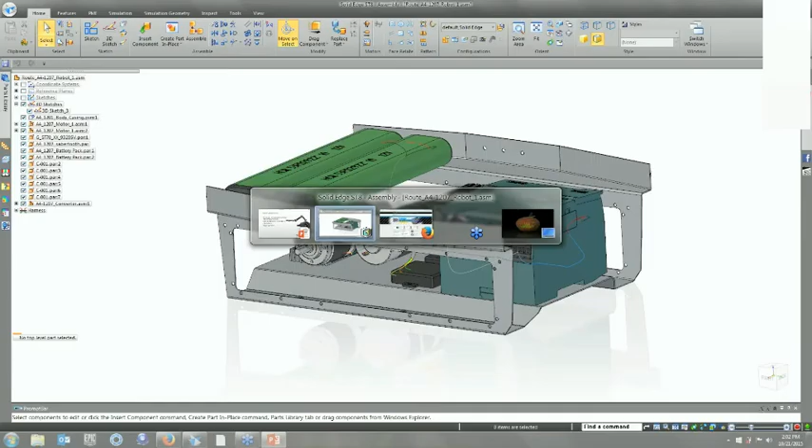Thank you, Diana. Well, thanks folks for taking a look. What we're going to be talking about today is wire harness. Again, it's not a well-known used portion of Solid Edge. This is the first time there's really been any much change to it in the many years that it's actually been in the product.

So the first portion of this, I'm going to show you some automated, basically, wire creation. I'm going to be using E3 Zuken. Basically, they can output wire harness information that we can apply to our 3D geometry by adding pins, connectors, and locations to geometry. So I'm going to go ahead and run through this process. Again, it's under the harness location in Solid Edge.

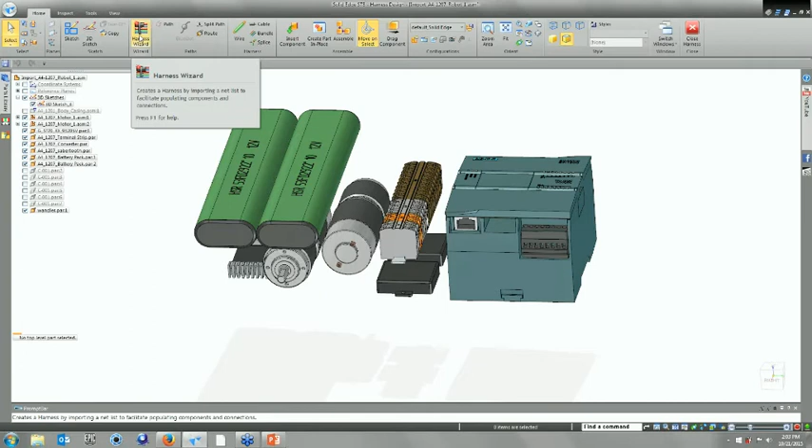All right, so we have this harness wizard. Most of the time, most people usually are generating lines based on their own sketch paths and telling those to be wires or bundles, etc. In this process, we're actually going to be using...

Let's see, where did I actually, I had these saved earlier. Let me go grab these real quick. Here we go. So these are actually coming from the E3 Zuken. I'm going to get the file location for these so I can populate that in Solid Edge.

So what I'm going to do is come out here and look for two different portions of this. First off, we have a component document, and it's an XML format. So we want to look for the CMP, which is the component portion of it. Then we want to go and copy the connection portion. So basically, it's telling it what component and what connectors on those components are going to be creating the lines for the wires. That's the two pieces of information I need.

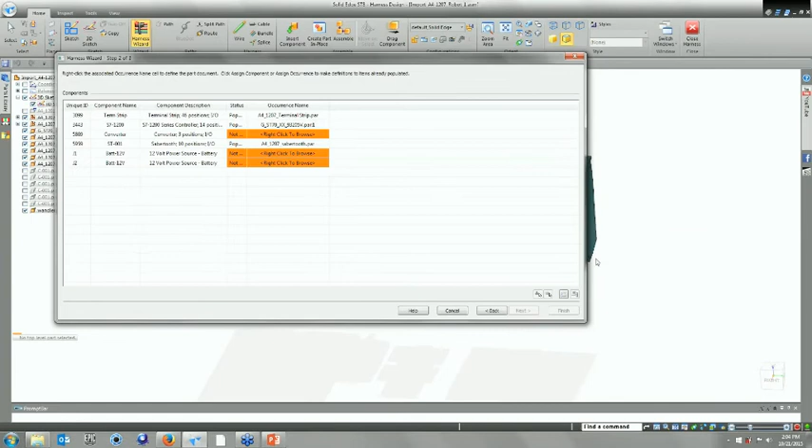There's a couple things that were added after the fact, before that wire path creation was, or that report was created. So there's a couple items we need to add. Let me minimize this a little bit so we get to our items. So there's a couple batteries, and there's a converter.

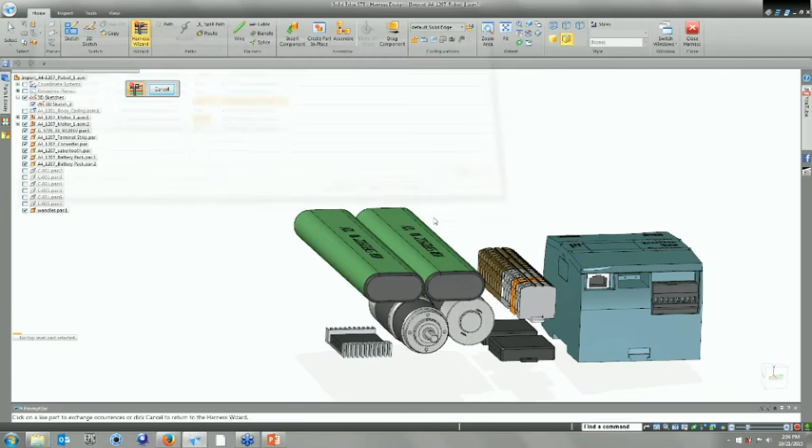And I know these two batteries are the ones I need to add to the list. I'm just going to go through and add that one, and let's go ahead and add the second battery. Lastly, let's go through and add the converter down here to the item list.

Okay, all right, so the last thing is just to go ahead and let the software finish it off. All right, so it's going to go through, and it's pulling this information, again, from that Zuken generated side. Of course, it works with Bentley Promis.e—there's 4 or 5 different wizards it works with. So it's pulling the information of what type of component it's coming from and telling what terminal it's going to go to. And here's the description of the items.

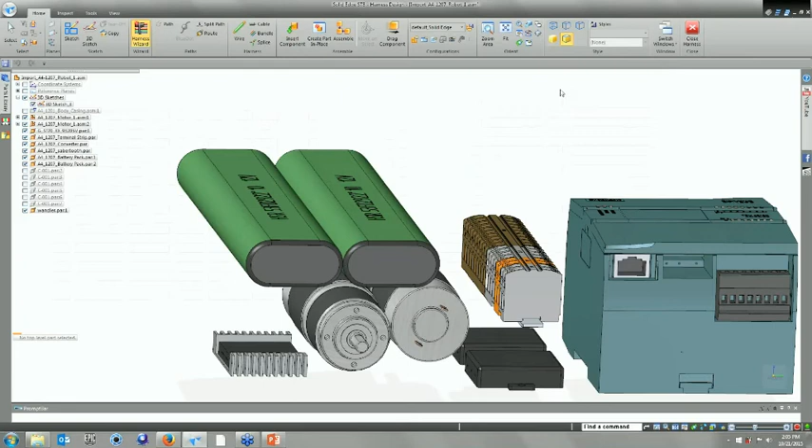You can actually go in any time and change the type of line you're actually going to create right through this table. I'm just going to leave the defaults because that's what's being referred back to the list. I'm just going to say finish. And there it goes.

All right, so what it did—it doesn't necessarily do a pretty job of locating the line, the actual connectors to go to the components, to the actual pins that they're supposed to go to. But that's what's new about the new version of Solid Edge, ST8. They have some of these new routing paths and some splice capabilities to create line paths.

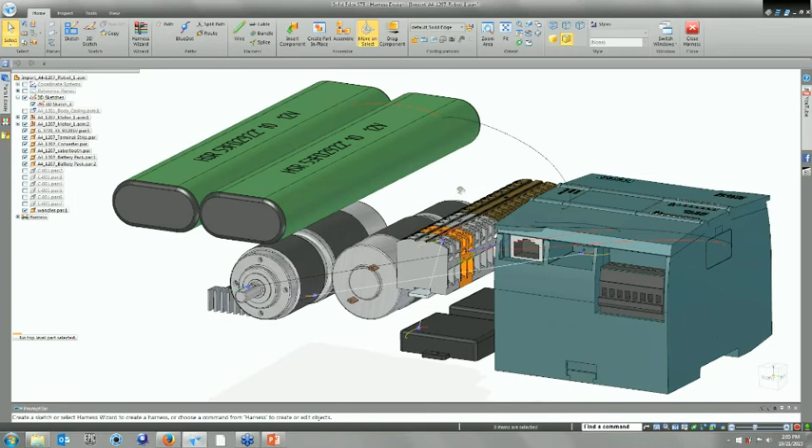So I'm going to switch over to a predefined one I've already created. Let me hide this actual sheet metal body around it.

So what we have here is the exact same layout, the same parts. I did the backside already, so I went through and said create conductors, and it actually made these components for me, but they're already in place.

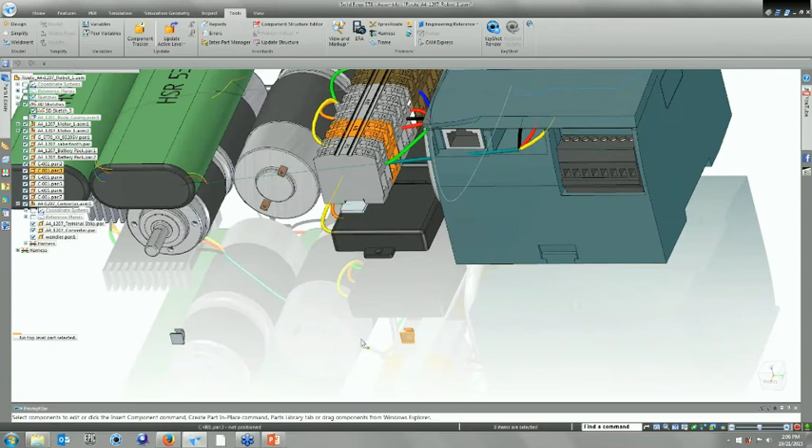You notice I actually have that path right here that's going through all these components. So I'm going to use these two little connectors in the front like I did in the back to locate these little bundles. All right, so that's the new thing we have right here.

So I'm going to get back into the harness, and I'm going to use what they call route. I can go and grab any of these lines, I can grab this bundle, and what I'm going to do is tell this bundle to locate itself. I'm going to use the cylindrical edge of this to tell it to go through this path, to go ahead and move it out of the way.

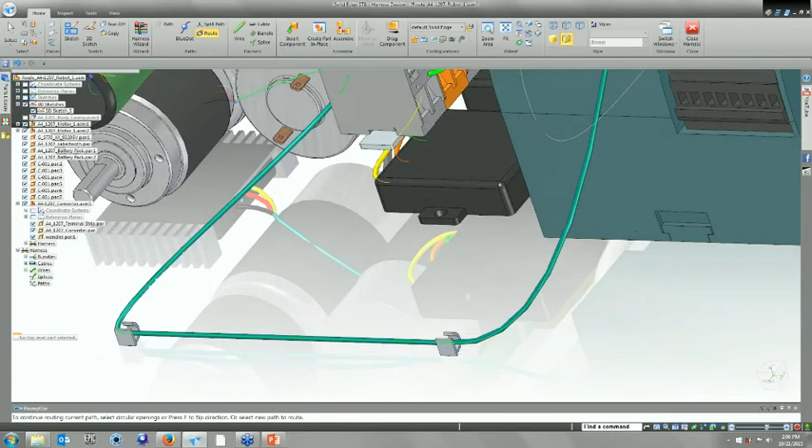And of course, it's still kind of bumping up inside there, so I'm going to go ahead and finish that off. Just going to go to my right side view, and I'm going to go ahead and just use the manipulation tool.

So for those who haven't used the wiring, let me move this around so you can actually see it. We have this little coordinate system, and that allows you to grab key points and move it in specific locations. So we have the planar option.

So if I want to move this planar anywhere I want, or if I just want to move it axially, I can just grab the axis. Of course, you can use your shortcut key, Z for the axis, X for the plane.

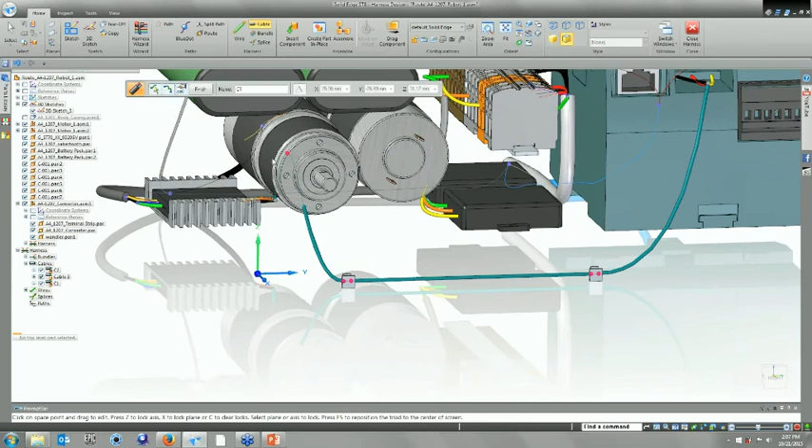All right, so I'm just going to go ahead and move it planar to the Y, and then I'm going to go ahead and say, let's go ahead and move it planar and Z. All right, so that's missing everything. If you just want to look at the side view, it's a little easier to see sometimes.

And let's just go ahead and move it to the planar location. So I'm picking the plane, and this allows me to move freely on a planar space as opposed to a linear movement. Let me move this a little bit further. That looks good right there.

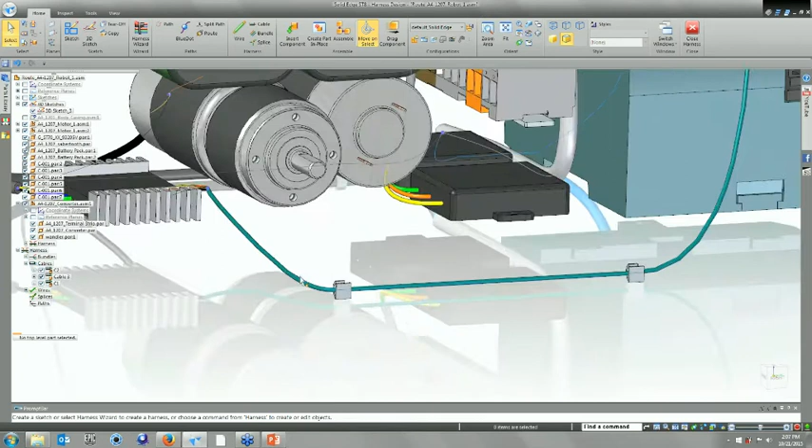All right, so that's taking care of that path. And of course, we need to actually add a few components to this. We only had one motor previously created, and we have another motor here that was added to the list.

Another component, notice we have that other converter that I added that doesn't have the information. So that's why these electrical wires were not created for these particular components, because there was no information to make them intelligent. So let me show you how that was done.

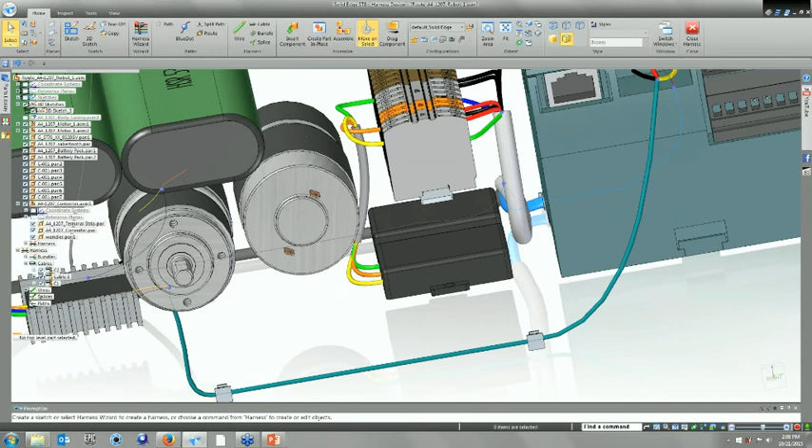All right, so there's no magic to it, it's really simple. Strangely, it's been in here forever, and I've seen this assign terminals, I had no idea what it was for. Now that I've gone through this wiring, some of the new stuff, I figured it out.

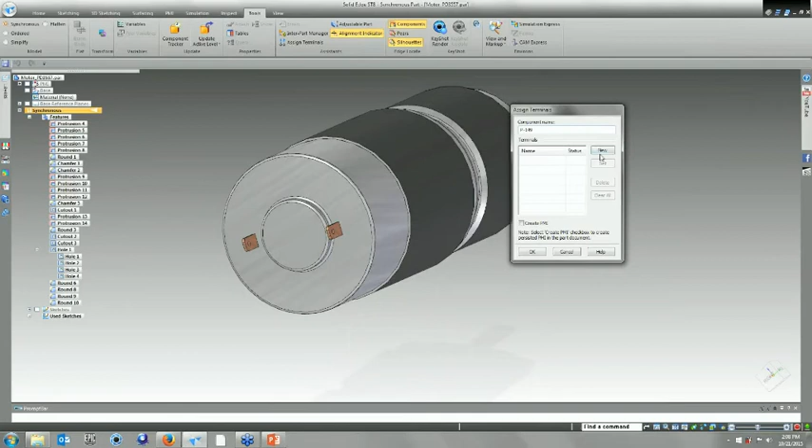So give it a name. Let's call this the unit, P149. Then we're going to assign the terminal. I'm going to say new, we'll call this terminal 1, and there's two terminals on here, so we'll go ahead and create them both at the same time.

All right, so I'm going to set this terminal to use that edge right there, so it creates this little PMI dimension for me. And then let's go ahead and set terminal 2. Go ahead and say create PMI, say OK, so I can use this later on. Then you'll see what I'm talking about.

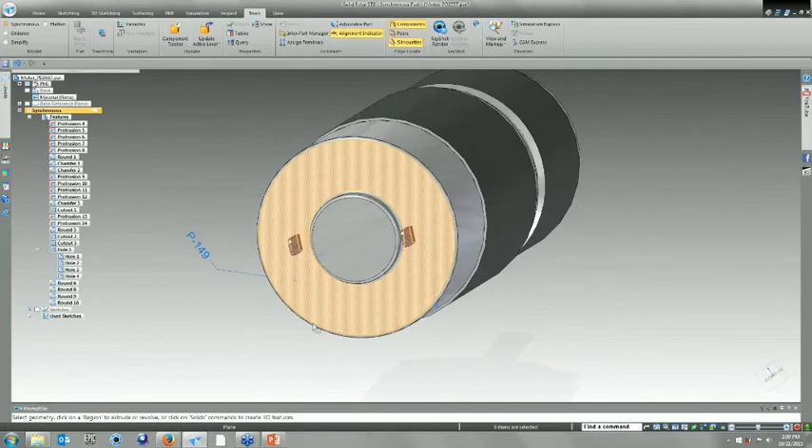All right, so I created that. That's really all that wiring diagram is. You just go through your parts and apply what connecting terminals go to what component. Simple as that. All right, so I'm going to go ahead and save that and close it back.

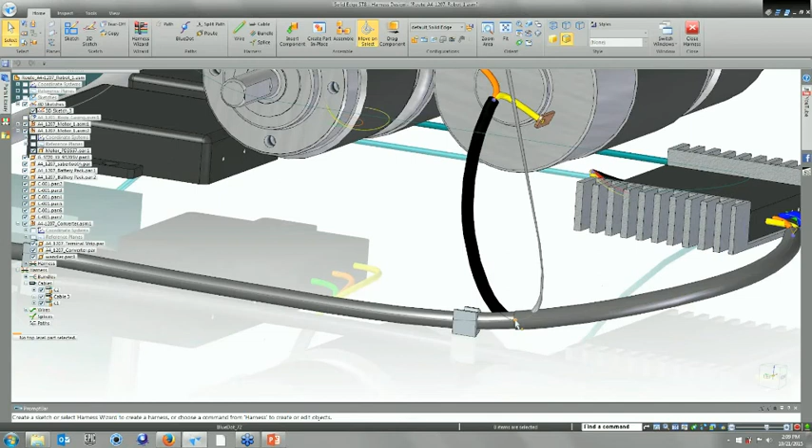All right, so let's go ahead and get this wired up. I can go ahead and run a path, but notice the one on the back has a little split in it, so they actually added a split here and added it into this little bundle.

Let's go ahead and create a path. This really hasn't changed since the previous version, but before I do that, I want to create a little split on this path to tie into. So I'm going to come over here and say split path.

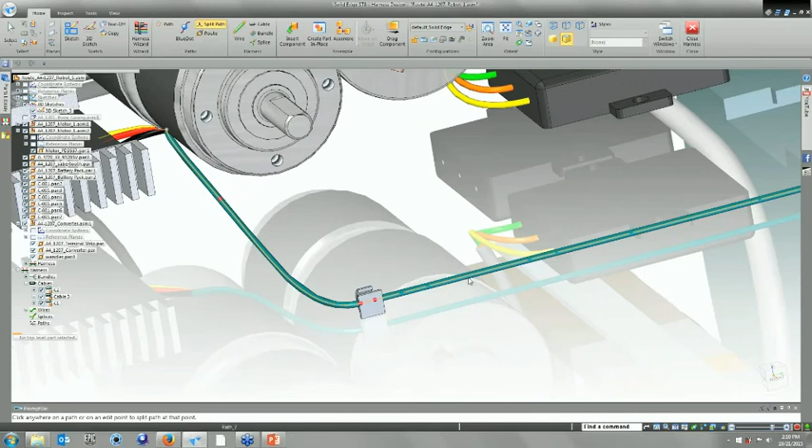So this is new. I can just pick anywhere along this line, eyeball it, and split the path right there. And let's go ahead and put a little split right there. So the wire is going to come in here, come out this end, and continue on.

All right, so now we can create our path. I'm just going to run a few lines here, and again, I'm going to look at it at a particular front view or side view. That way, when I'm placing my geometry, I'm just looking at it from this view.

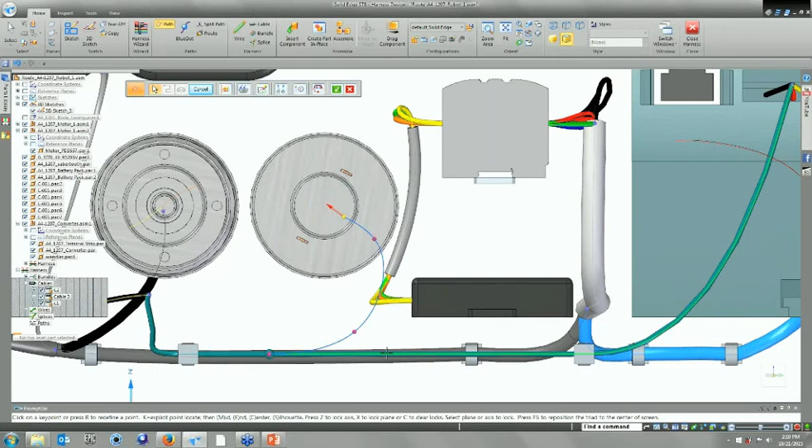You'll see what I'm talking about once I place it. When I go back to my ISO view, you see it's a straight line, which is fine, but we have these little key points in our coordinate system. So let's move that in closer, and drag that dot a little closer.

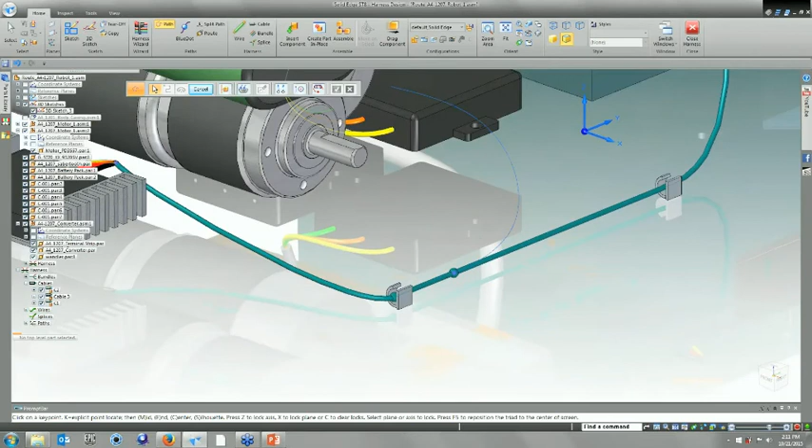Now that we have that position, that looks good. Go ahead and finish that off, and then we'll create another path. This one, I'm going to come out of, rotate around so I can grab that endpoint. There we go, I'm going to grab that endpoint right there.

Again, let me reposition myself, looking straight at it, and do the same thing. I want this to kind of come close to that connector point right there. Same situation, we need to move it over. So I'm going to grab the key point, tell it to move in the x-axis, and just move that down.

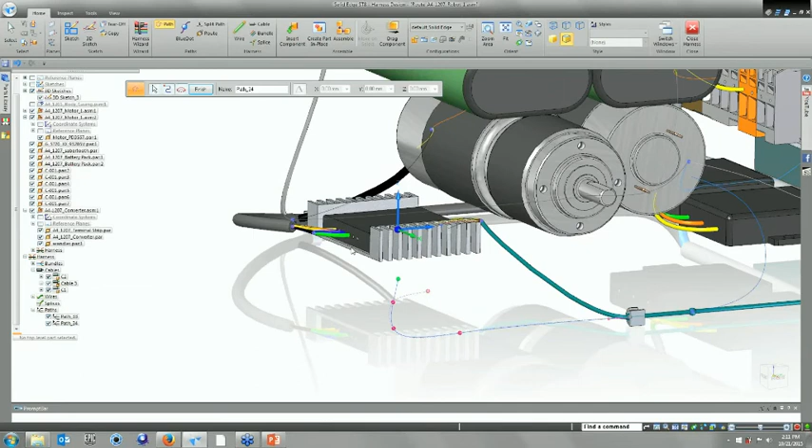Let's look at the top view to see how far I'm doing it. Just go ahead and keep dragging that. That should be good right there. And it's not that point, that point, let's go ahead and move that. That should work, that looks like a good place to put a connection into. All right, so that'll work.

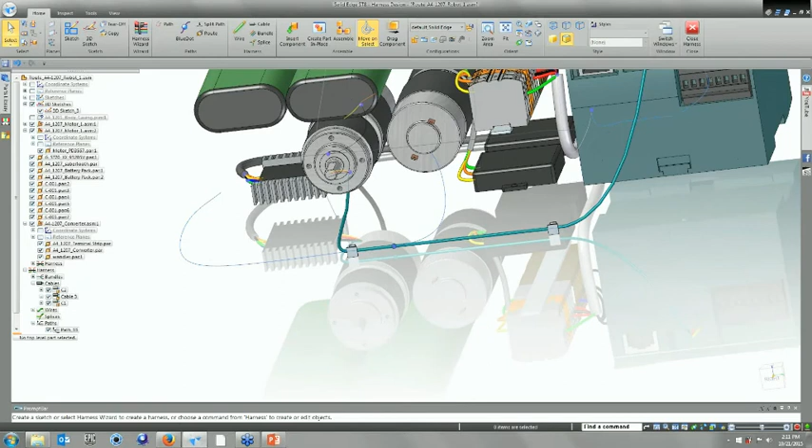All right, so now let's go ahead and actually create the wires. We're going to tell this component where to go onto this guy right here. So I'm just going to do a wire. And this is where that step that came in useful a while ago—I had the ability to show connector information. So as I pick over components, we'll show you which connector item you have so you can connect it to the right location.

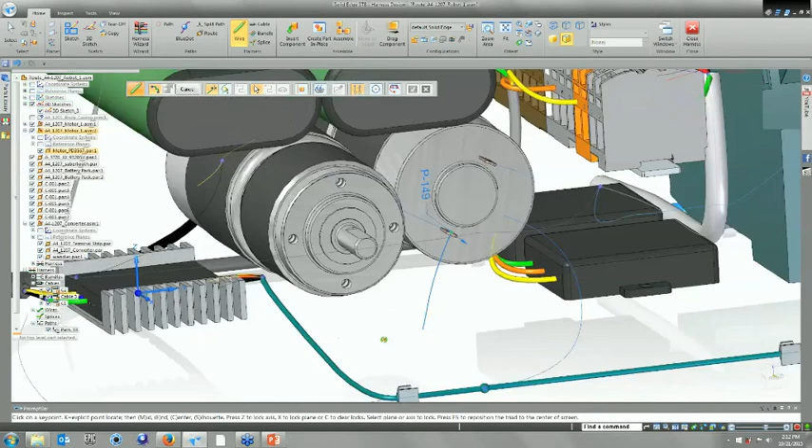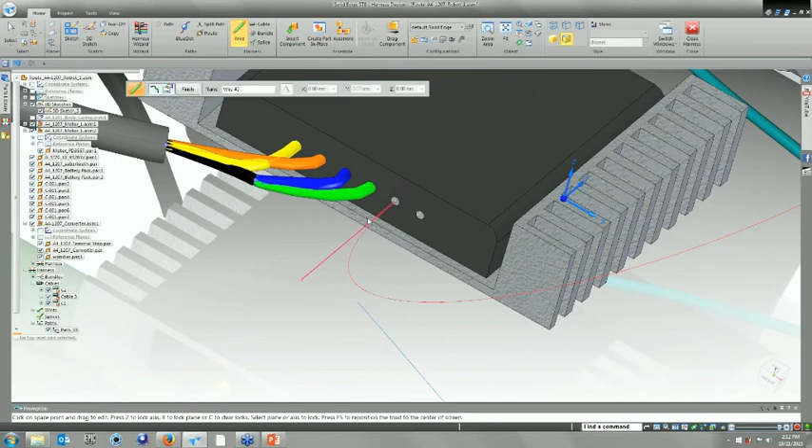All right, so I'm just going to go ahead and grab that point and feed it into that right there, and let's make it red—make the first one red, so that's going to be a red line. And of course, I don't want it going in that direction, I want to drag it out that direction. So you can just use this little tangent snap to position it and say how much curvature you want to come out. That looks good right there.

All right, so let's create the second line. Since I only have one more terminal, I know which one it's coming from. So I'm just going to grab that terminal and do the same thing to that location. There we go, that one came out in the right position. So let's make it blue—let's go through orange, green, gray, blue. There we go, and finish.

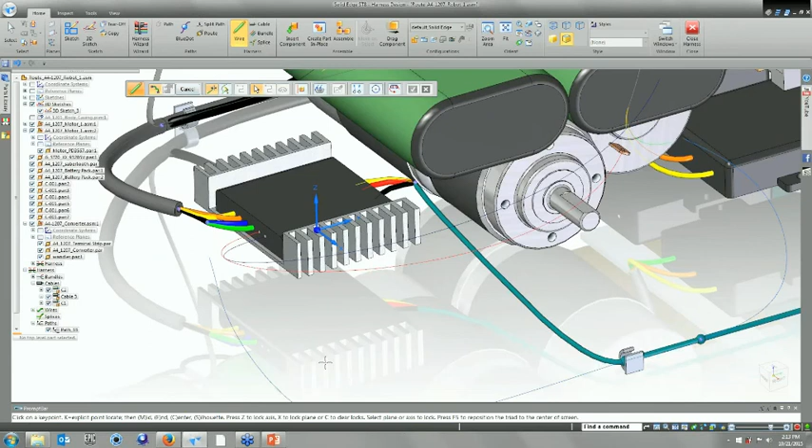All right, so now that I have the lines connected from where I wanted to go from to where I want to go to, let's put these inside that little area that I created. And of course, I'm going to create a little jumper area for that. So I'm going to say I want to create a bundle and select the two items I want to be part of that bundle.

And here's the start of it. So I want it to go through here, through this section, and end up coming out this section. And accept it. I like making this a different color, let's make it gray.

If I leave this blank, instead of picking which size I want, it'll actually look at the gauges of the wires and give you a jumper area suited to fit all this cable.

So as you can see, these go to that little section there, and these trim back and go to this section here. The last thing I need to do to make these real, this is the process you always do as you're creating the lines inside here, is right click and say create physical conductors.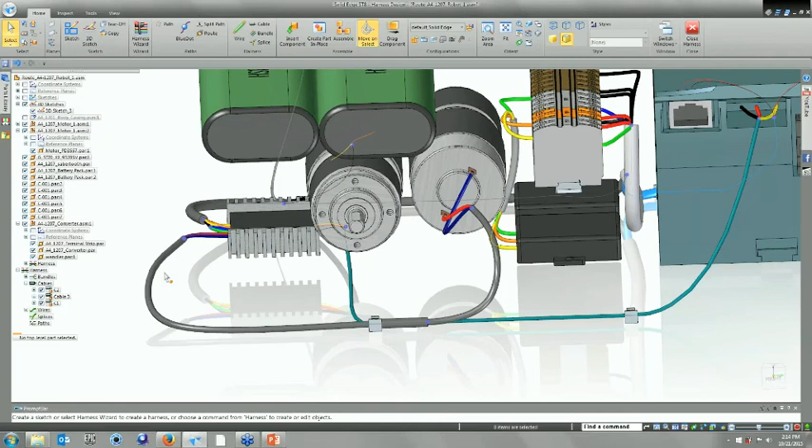Pick the right one, and now you can notice we have our little jumper area in here. And since we're still running through the path, if I did this right, I should be able to move this, and since it's all part of that location, it should ask to let me make changes without moving. So there we go, it should automatically fall wherever you put your connector.

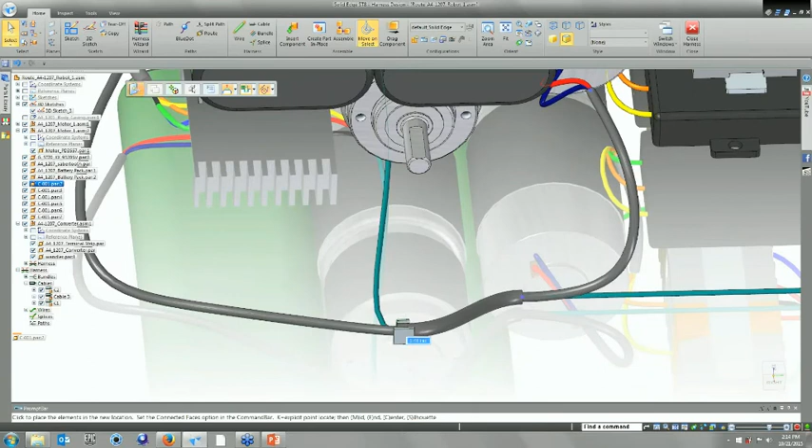Push that out and push back in. There we go. So that is a couple new things that we have there.

We also need to, I added that other converter in here, connect it to this box. So I have this as an assembly. Let me switch over and open up this part here, and open this up to make it a little easier to see.

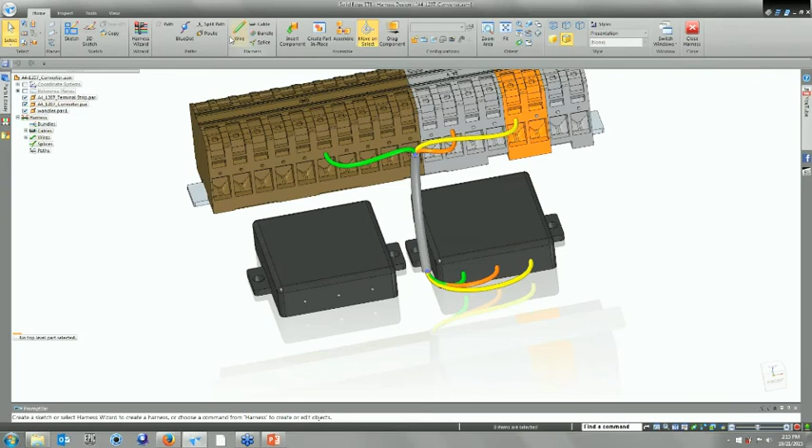So this is another thing that's new to ST8, the ability to add splices into the geometry. First thing we want to do is create a splice point. This is a very simple tool, you can use it on individual wires, so I can pick a wire.

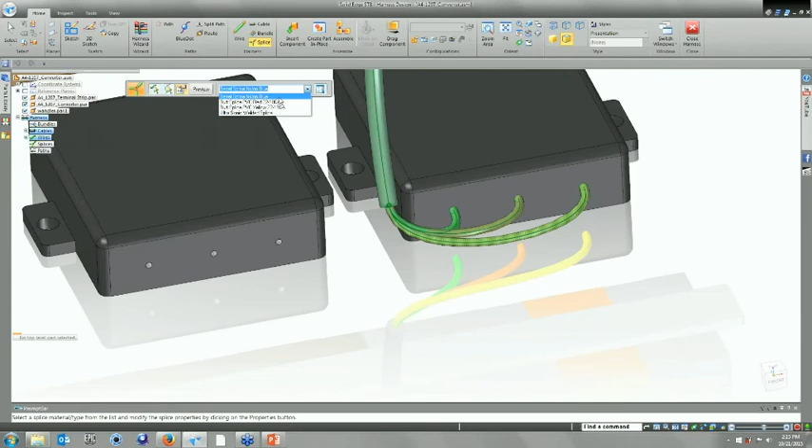I'm going to tell it I want to splice a wire, but I'm going to use this little bundle to splice it with, so I'll pick the bundle line. You notice I get a little dot kind of, and it's asking me where I want to split this. I'm just going to pick that location right there. A couple different things to add as the splice, I just use the default barrel splice blue, that works for me.

Then we need to go ahead and wire this up the same way, because basically it's going to the same location, we want the same connector. So just create some wires here.

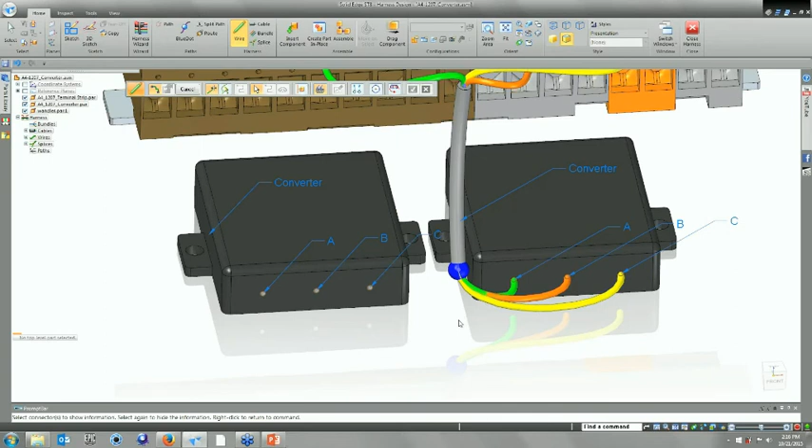Again, this tool I used earlier, I can go ahead and pick both of these so I know these are in the same orientation. This part may be mirrored or something, and I wouldn't want to reverse these. So basically it's going to follow green, orange, yellow. Let's go ahead and create these paths.

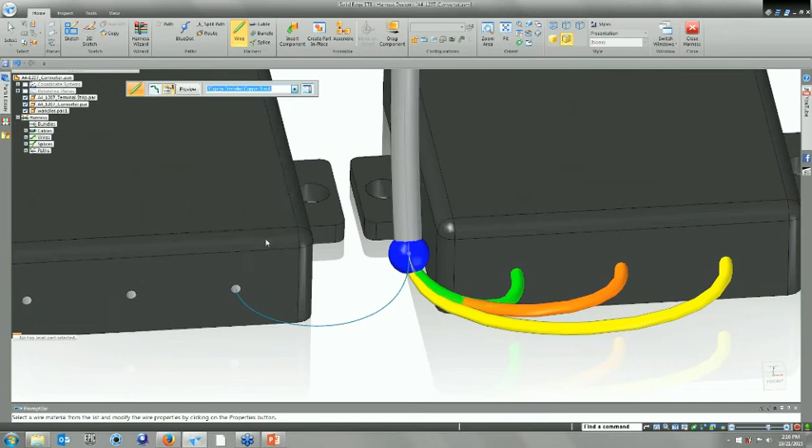I'll use a different connecting point here. So I'm just going to grab that endpoint and position that. So that one would be yellow. I know these are 26 gauge, pretty thin. So let's say, oops, that's black. Yellow, there we go, finish that off.

That's good. Again, these have tangency points, so if you want to locate these more precisely, you can. All right, let's do this last couple real quick here.

Oops, do that one good. Oh, sorry, I hit escape, that was my mistake. And all right, now we got the second one going here.

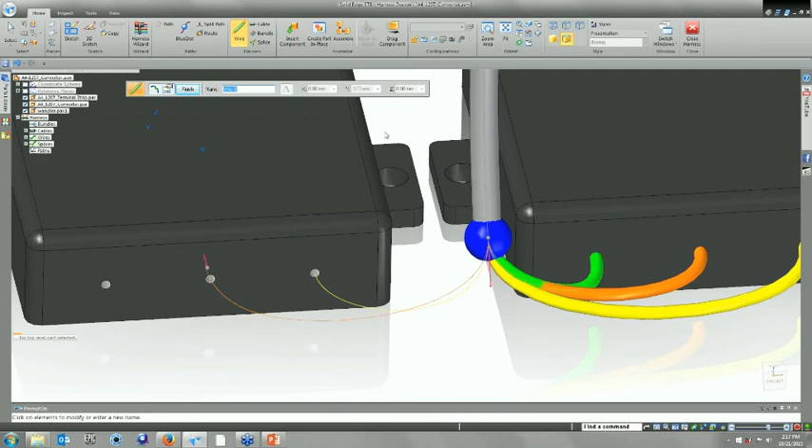And we'll make this one orange, and of course the last one will be green. Move that tangent point so it's coming out of it.

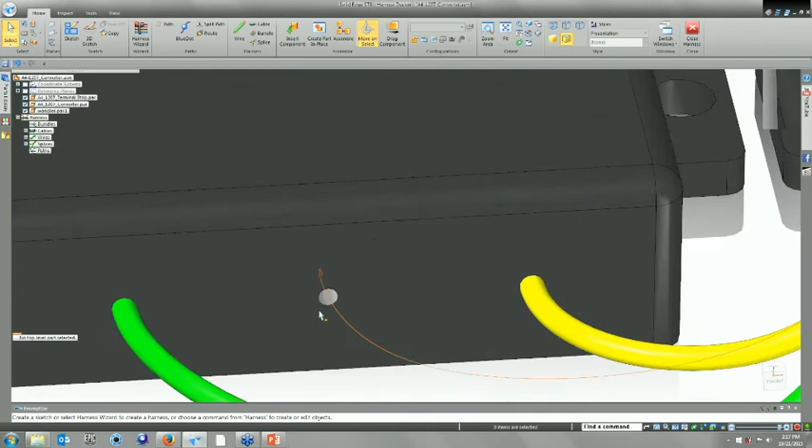There we go. Then the last thing to do is, since I already split that, I just need to come over here and say create physical conductors. Oh, I knew that was going to be a problem, I screwed up the connect point down here, I actually bent that back on itself. I'd have to recreate that line, but you get the idea of how that actually works.

So I can split locations anywhere I want and continue adding to them. Simple as that. Let's go ahead and close and save back to my top level.

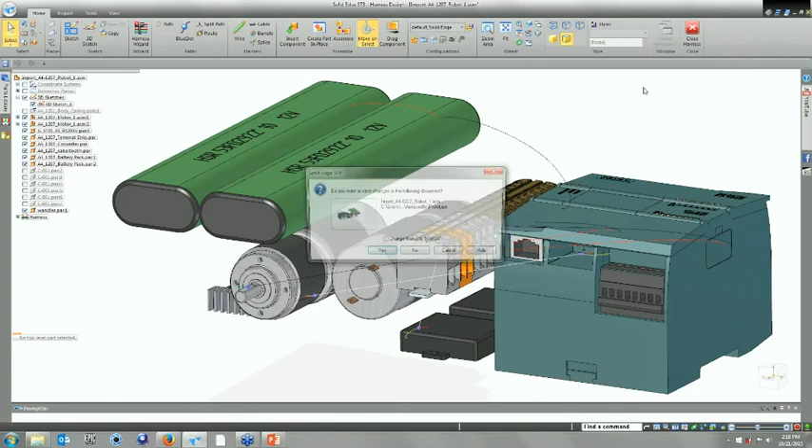So the last thing we need to cover is what's new in the drafting portion of it. Let me go ahead and save this assembly, we need to save that one, and let's open up the draft portion of this.

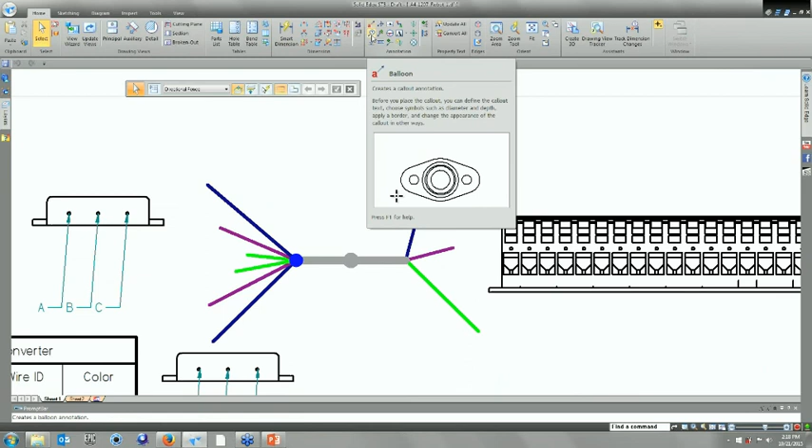Some of this was existing in previous versions, so some of it may be new to you, some may not be. But we had the ability to create basically nail boards in previous versions. With some of the new technology in ST8, we can actually label these a lot easier than we could previously. I showed this in last week's video that I did on drafting. So how we do this is we have the ability to map to properties and to different types of reference geometry.

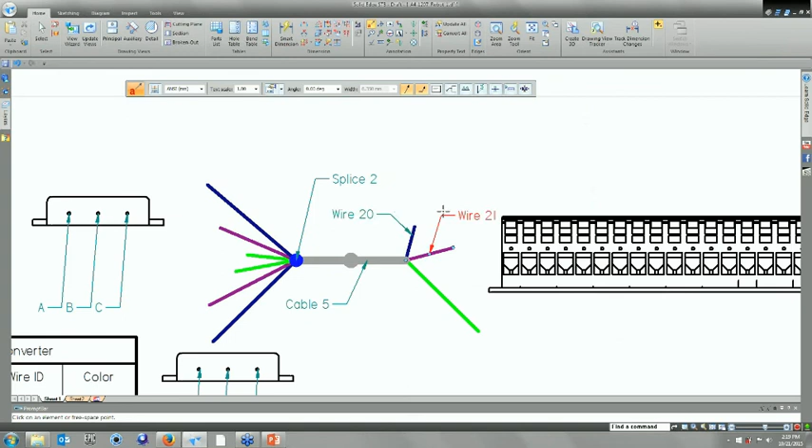So let's take a look at what we're looking at for under values. I want to go to wiring harness that we have on the screen, and I want to copy the name. So let me say name, and say okay. So now it actually puts that in my list. Now as I hover over the geometry, I can pick individual items if I want to easily label the wire so I know which wire is going where. Very useful tool, and that came out in 8.

And some of the new stuff in 8 and draft - typically nailboard is drawn one-to-one. That way you can print it one-to-one, put it on a piece of plywood, lay out your nailboard so you can start creating the wire harnesses from it.

For this situation, they needed a scaled version, maybe for documentation or something to send to customer representation, I'm not sure. But now we can actually create scaled nailboards.

So I'm going to come over here and grab an assembly - this one right here. There we go, I'm going to say okay. So typically one-to-one is what you're going to get, but now we actually get this little scale bar. So I'm just going to scale this half scale. That should work. Let me go ahead and reposition this a bit better.

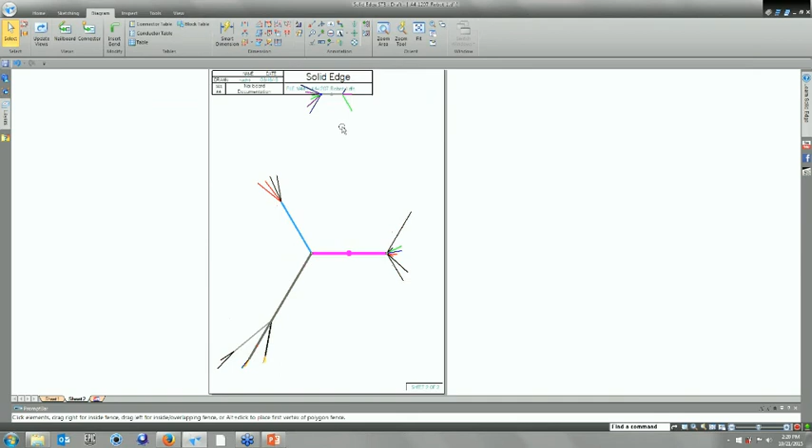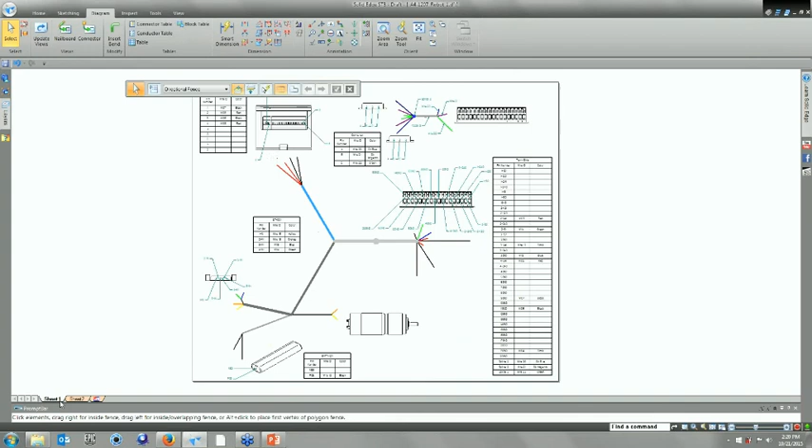And something we're actually able to do now is create a conductor table for all these items. Notice we have sheet 1, which is the overall layout with the BOM, and of course sheet 2. Now we can actually create a conductor table.

Let's use this assembly right here. Tell it to use the harness configuration. And when I accept it, notice what it does - it actually labels and gives me a table that breaks it out onto 3 different sheets.

Because usually there's a lot of information in these, we actually create individual module or individual tables now under sheet 2 for that information. All right, that is what's new in ST8 wire harness.

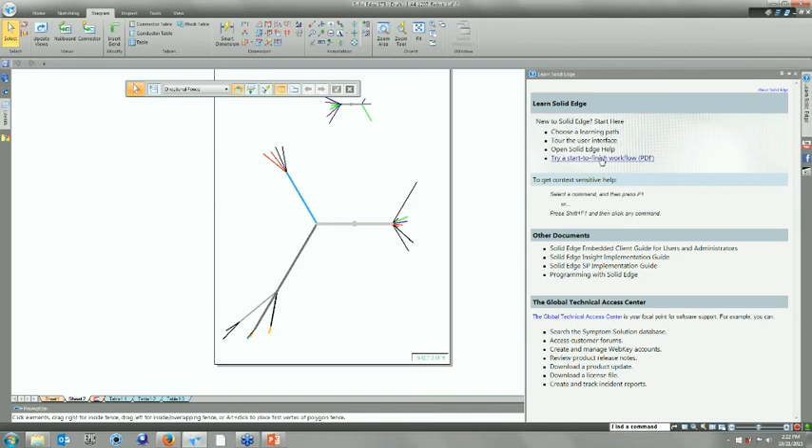Let's see what they have in the training file. So through the interface, you can go out to - I like going to the self-paced classroom because it pretty much has everything. Let's go see. Down here. Wire harness - yeah, there is actually training files on wire harness.

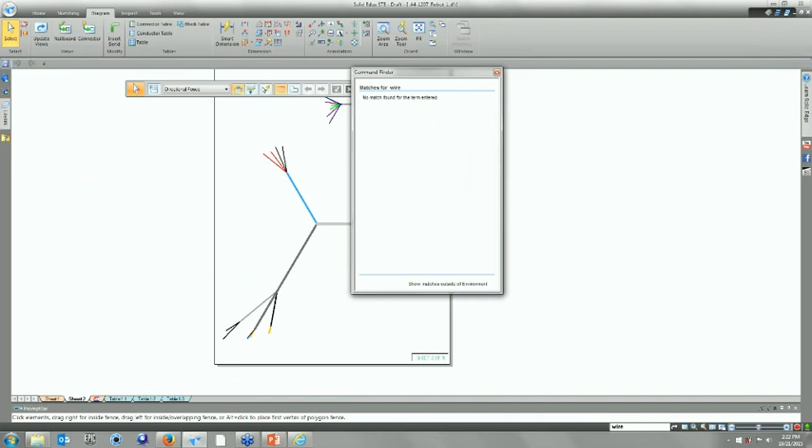So for those with Solid Edge access, you do have access to get to these. And there probably is something in the help files as well. Let's actually see. Actually, that would be in the assembly portion of it, not where I'm at. I'm sure there's actually a harness help file too, that would give you some tips and pointers.

We do have one more question, Dylan. Can blue dots be constrained? No, if you want to constrain a blue dot, you would actually constrain it to a coordinate system. So just create a coordinate system anywhere you want and put a blue dot on top of that. That way it's located precisely off that coordinate system. It cannot move, only if you move that coordinate system with the blue dot. That'd be the safest way to constrain that.